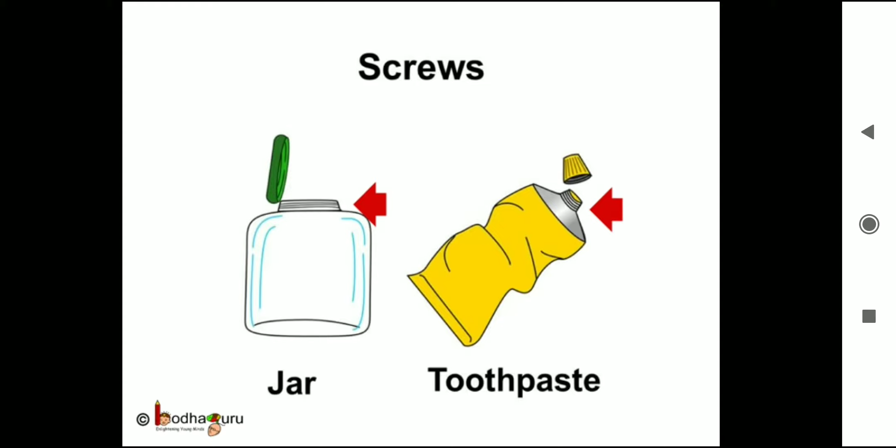We will learn about a very interesting topic, and that is about the most friendly object to us human beings: machines. When you open a jar or toothpaste tube, you rotate the cap or lid, right? You may have seen the small nail-like things used to hold these things. These all are a type of machine called a screw.

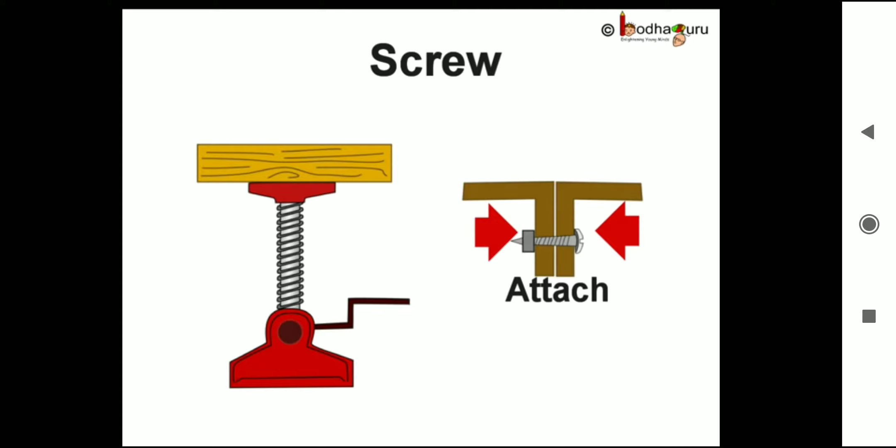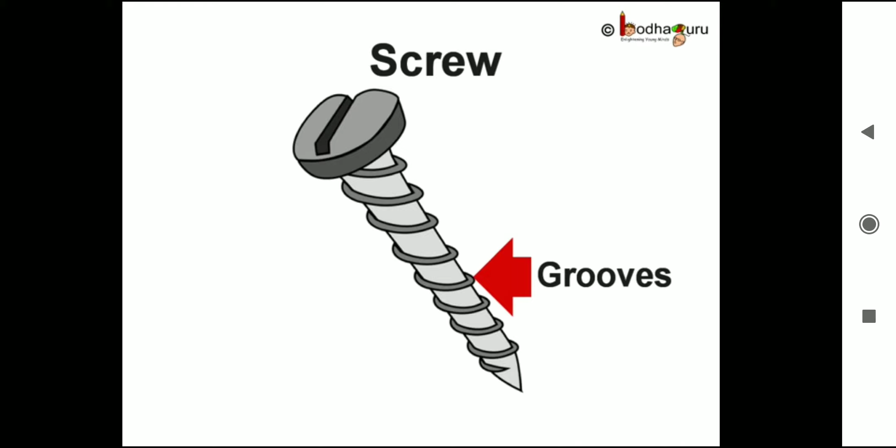Screws are used to lower and raise things. They are also used to hold objects together. A screw looks like a nail with grooves cut into it. It has a winding edge with threads. This winding edge is actually an inclined plane wrapped around a rod. Surprised, right? How does a screw have an inclined plane?

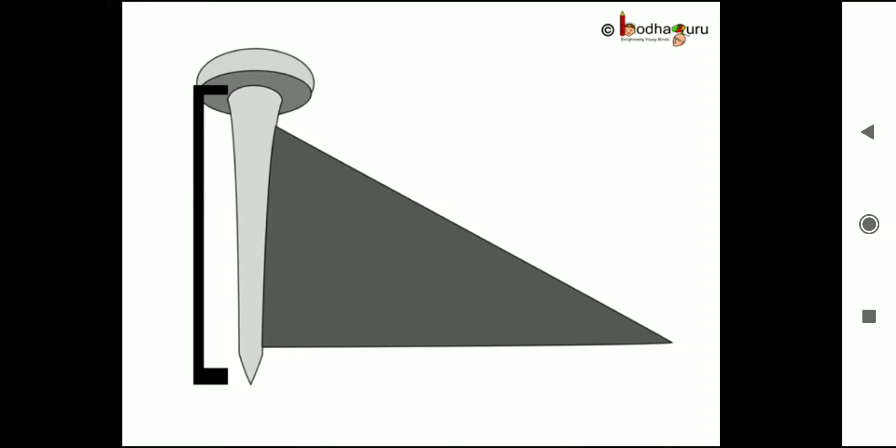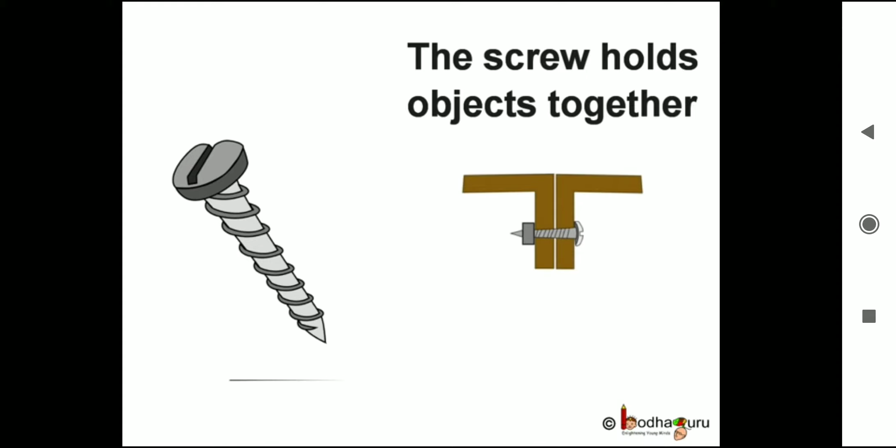Imagine you are folding a paper around a rod, and you fold it at a slanting angle so that the paper goes all around the rod. If you remove the paper, you will see that in a small length of the rod a large length of paper fits in. And these threads are very similar to the paper. In a small length, a larger number of threads fit in, and that is what makes the screw hold the object together. The screw also has a groove on its head where the screwdriver fits in.

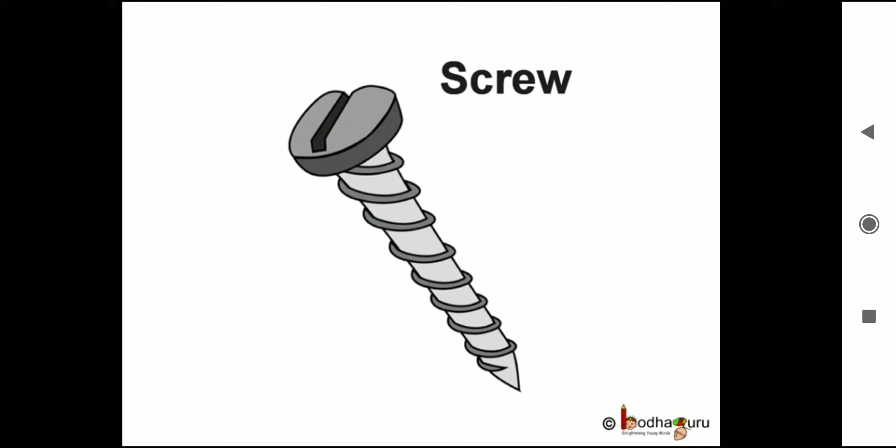The metal or plastic lid on a glass jar is nothing more than a wide screw. The glass jar has a raised edge that forms a screw shape, and the metal lid has a matching thread on the inside. Turn the lid one way and it comes off the jar. Turn it the other way and it tightens the jar.

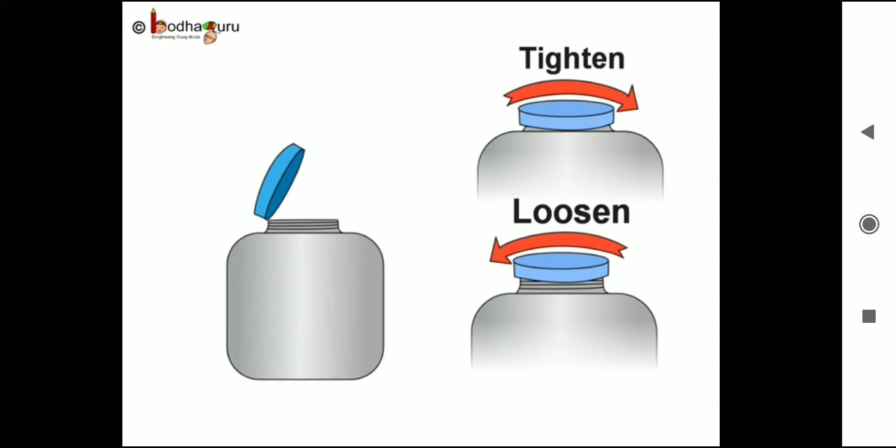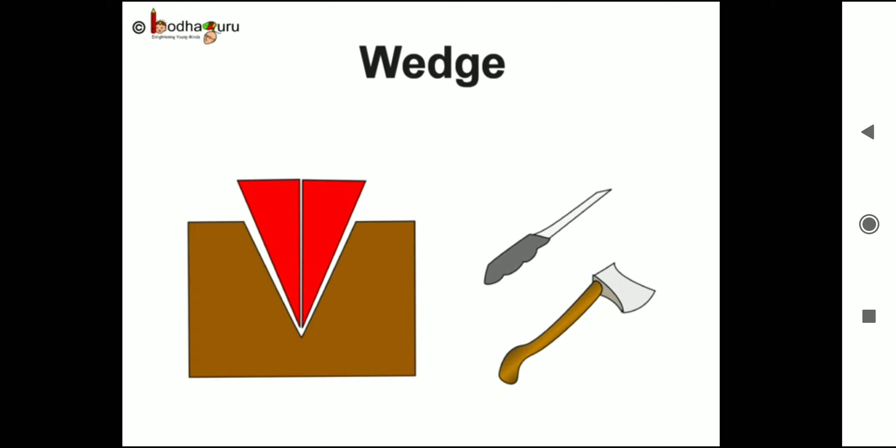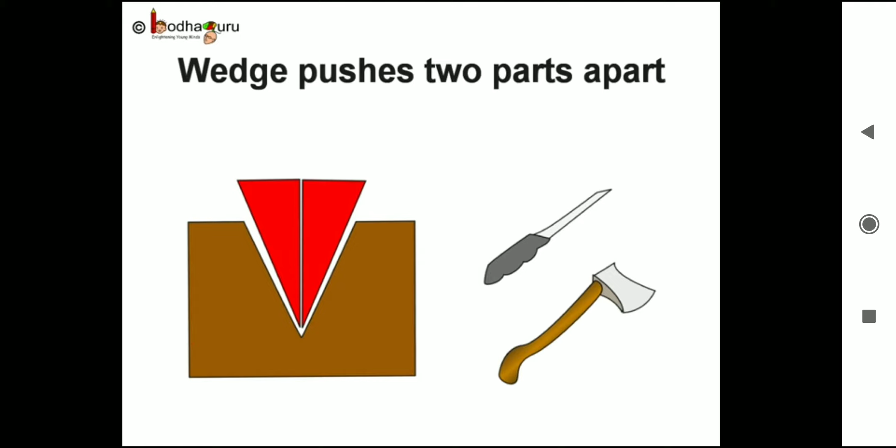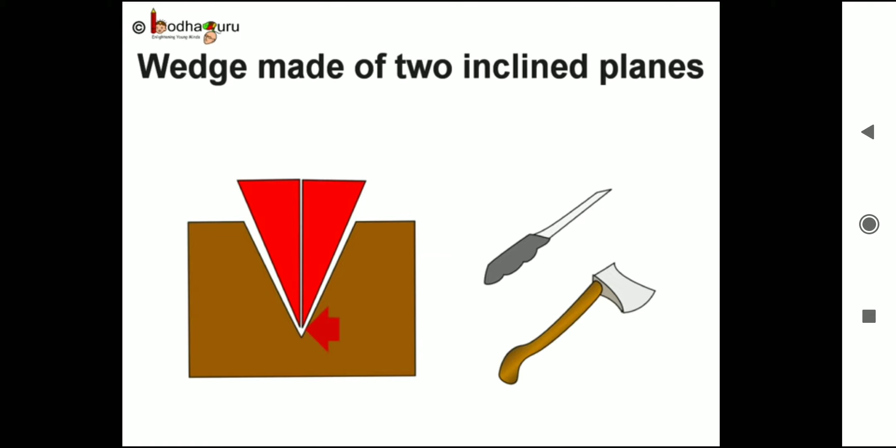You know, our kitchen knife or woodcutter's axe is also a machine. They are called wedges. A wedge is a simple machine used to push two objects apart. The wedge is one of the oldest mechanisms. A wedge is made of two inclined planes. These planes meet and form a sharp edge. This edge can split things apart, so mostly wedges are used for cutting.

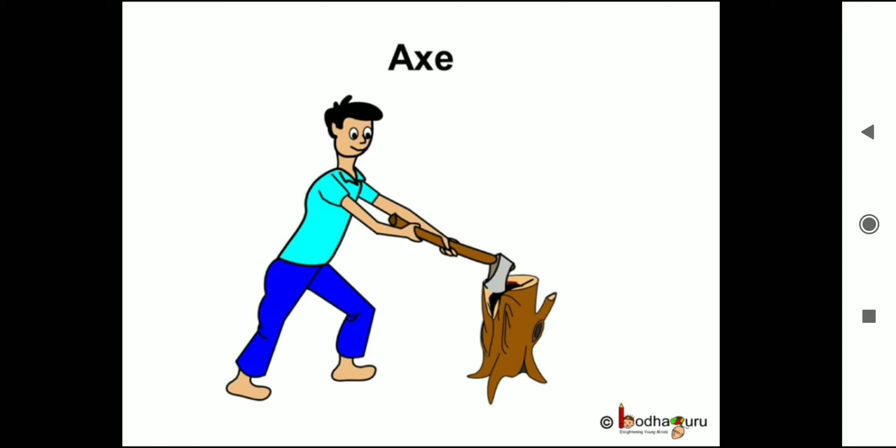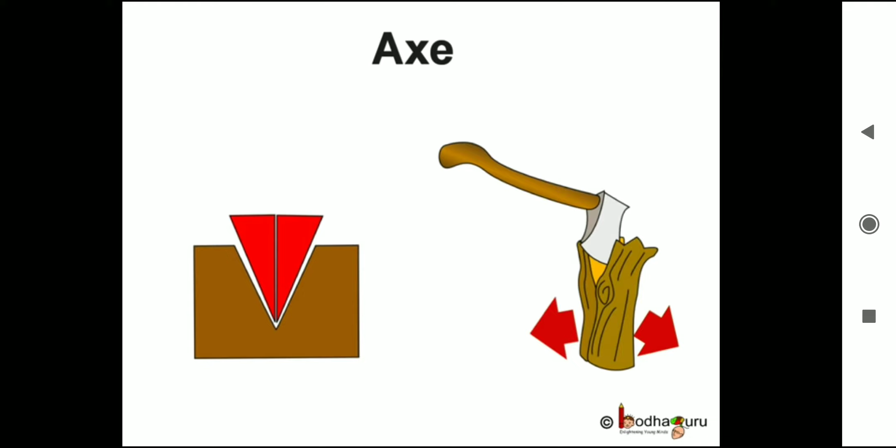A good example of a wedge is an axe, where the head of the axe is made up of two inclined planes which do the work of cutting the wood. We push the axe downward on the top of the wood. The wood is not crushed under the edge of the axe, but rather it is pushed apart into two pieces as the axe moves through it. Nails are also an example of a wedge, used to concentrate the force of the hammer. This way, the nail drives deep into the wooden object or the wall with little effort.

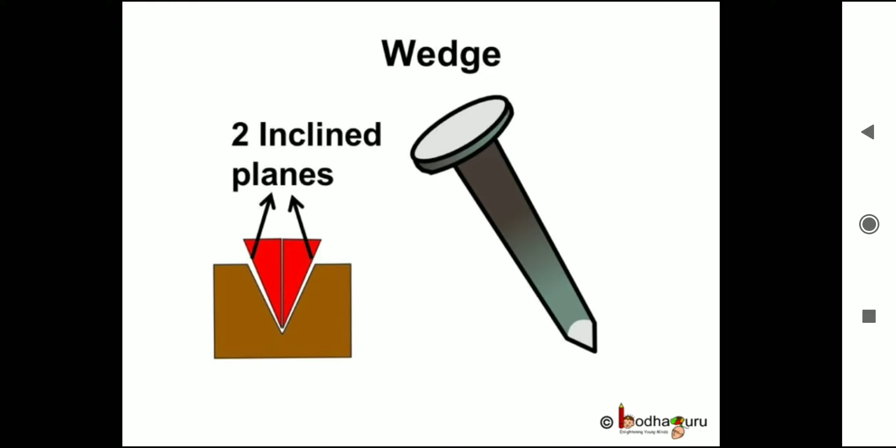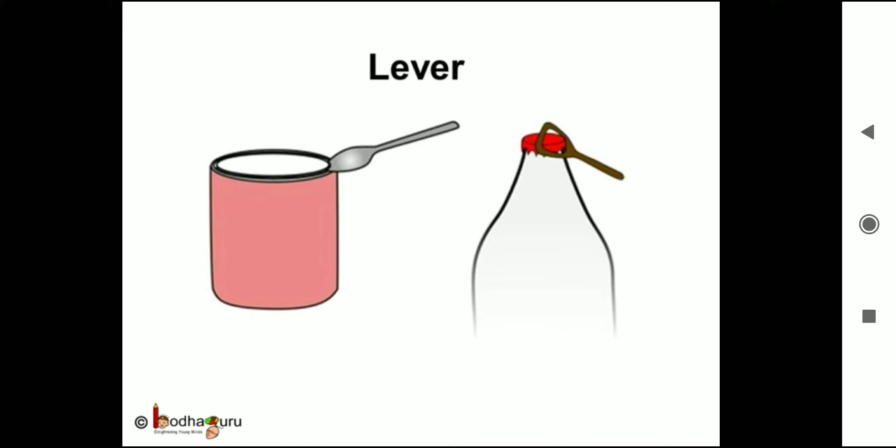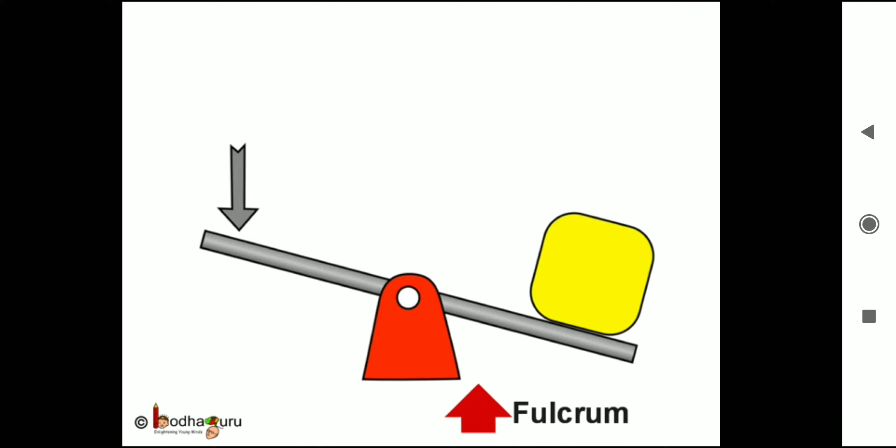When you open a can with a spoon or open a bottle with a bottle opener, you give them a support and apply force to open them, right? This opener is called a lever. So now we will talk about the lever. A lever helps you move something heavy or make something go fast. A lever is basically just a long stick or board that rests on a turning point. This turning point is called the fulcrum of the lever, and the object that the lever moves is called the load.

So a lever needs four things to do work: a bar, a fulcrum, a load, and an effort. The components of a lever can be arranged in three different ways to give three different kinds of levers: first class lever, second class lever, and third class lever. Let's look at each of these. The first class lever is the one you may be most familiar with.

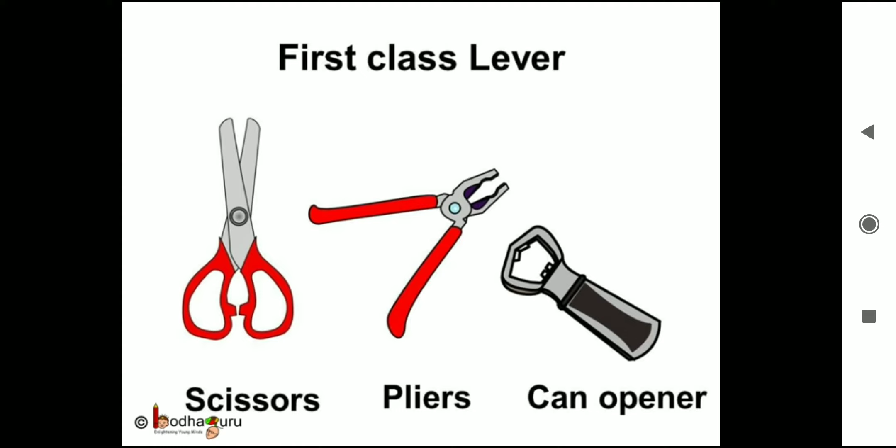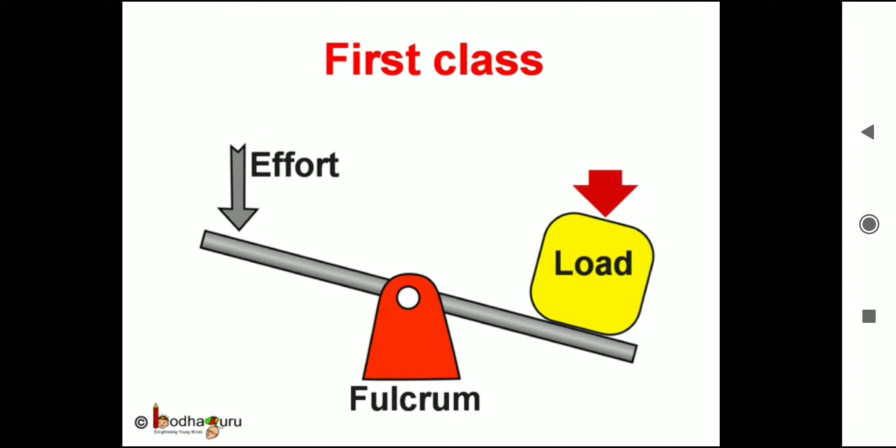Scissors, pliers, can openers, or a seesaw are some examples of a first class lever. In a first class lever, the fulcrum lies between the applied force, that is effort, and the load at the opposite end. A good example of a first class lever is a seesaw.

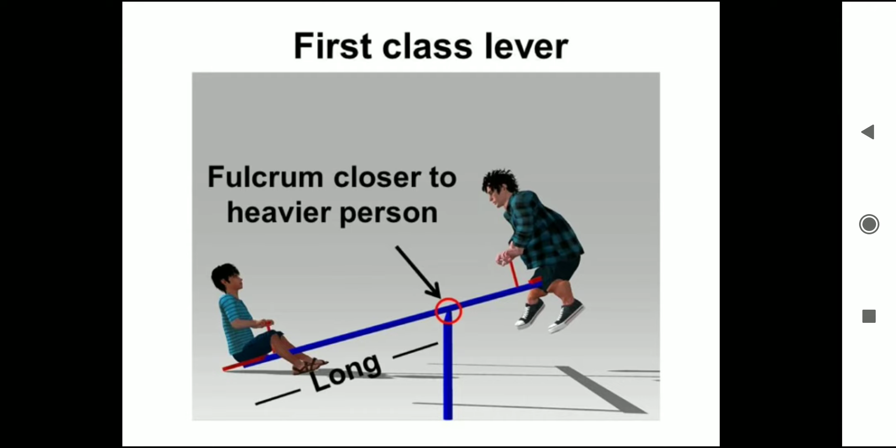Let's say that you are really light and you want to lift a really heavy person on the opposite side. If you put the fulcrum in the middle of the seesaw plate, you won't have a chance. But if you slide the fulcrum closer to the heavy person, it will be easier for you to lift if you sit on the other end. How? Because your side of the seesaw is much longer, so when you move from a much greater distance, you have to put less effort to lift the heavier person on the opposite end, and that is what a lever does.

Scissors are first class levers too, because the fulcrum is between the applied force and the load. The load are the blades. Our hands are applying the force on the opposite end. The more the length of the handle of the scissors, the less force of cutting will be required.

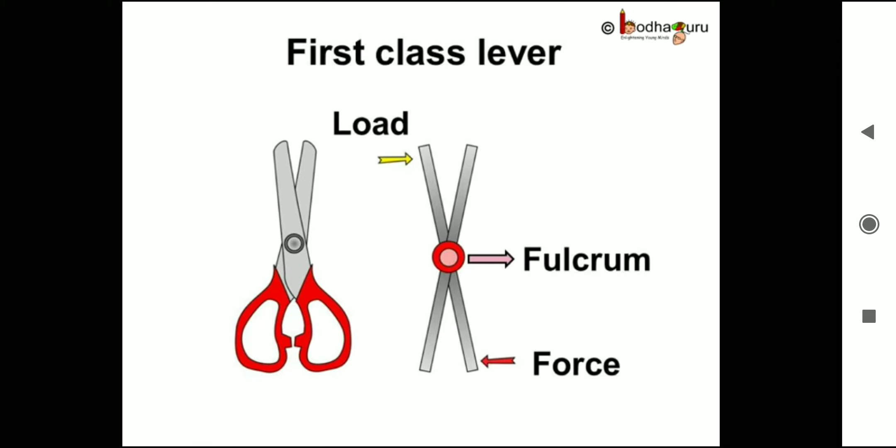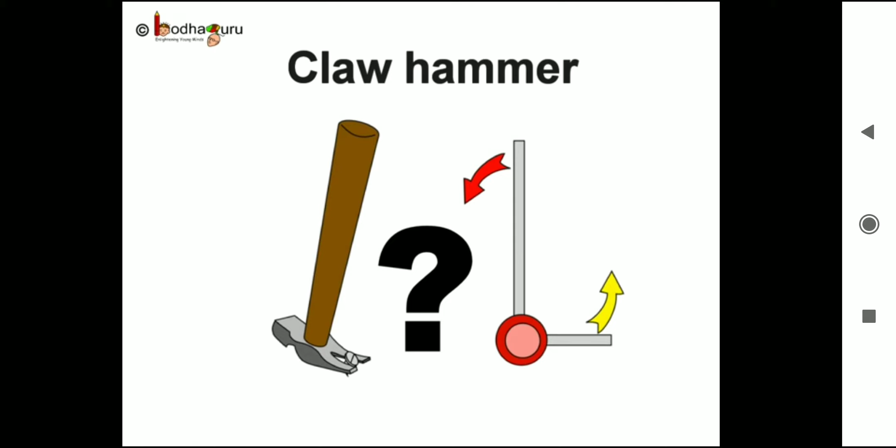A claw hammer is also a first class lever. Confused? No, look at it. The handle and the claw of the hammer work as a lever arm. The fulcrum is the top of the hammer head, which rests against the wood, and the nail you are trying to pull out of the wood is the load.

So the load is on the one end, fulcrum in between, and your effort on the handle is on the opposite end. And as the length of the handle of the hammer on which you apply the force is more than the length of the claw on which the nail is attached, you don't need as much effort to pull the nail from the wood.

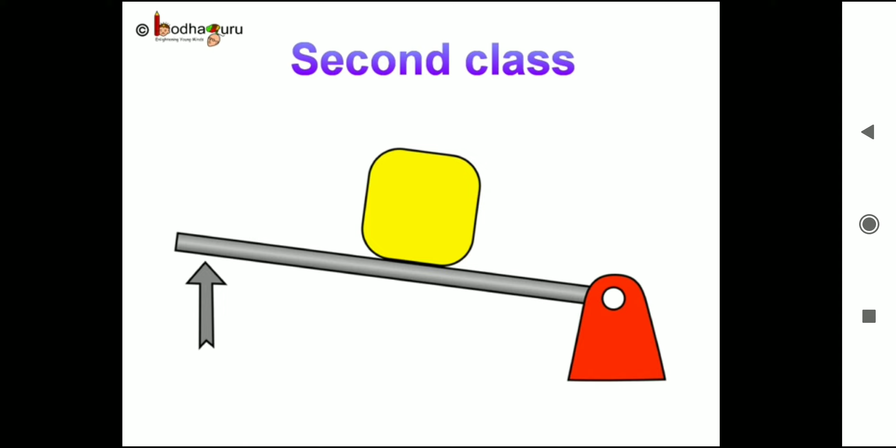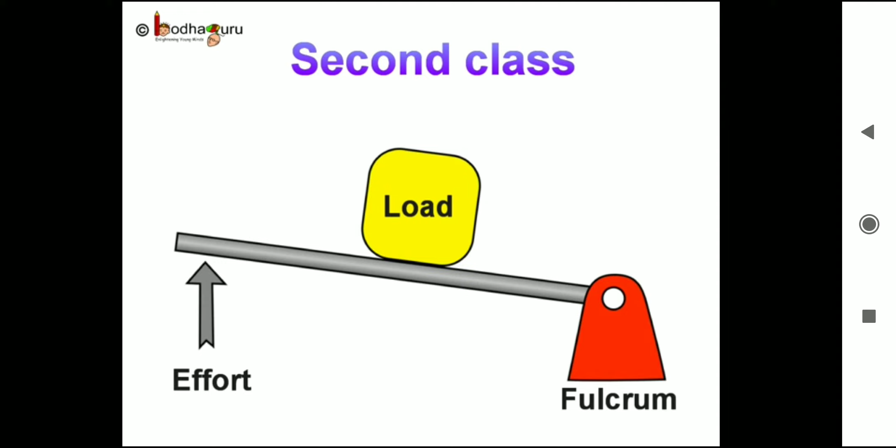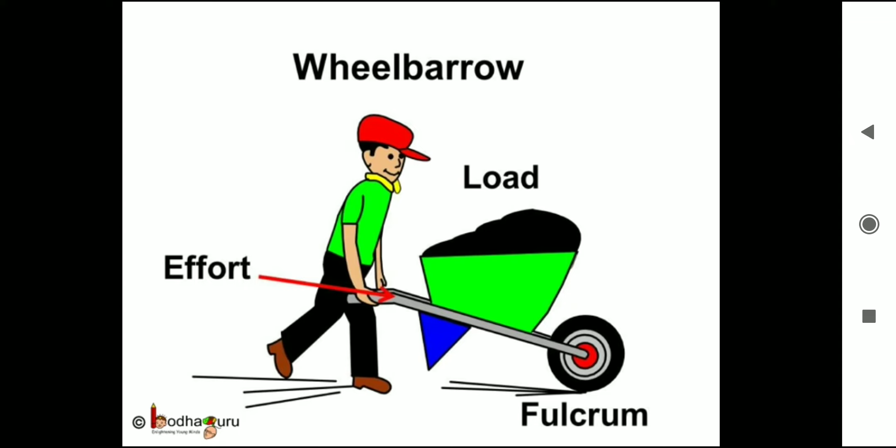The second class lever is one where the fulcrum is at one end and the applied force is on the other. Strange, isn't it? The load that is to be moved is between the fulcrum and the force. The best example of a second class lever is the wheelbarrow. The wheel is the fulcrum. The handle takes the effort and the load is placed between them. The effort travels a greater distance to the fulcrum compared to the load's distance to the fulcrum. So you can lift a heavy object using the wheelbarrow by applying less effort.

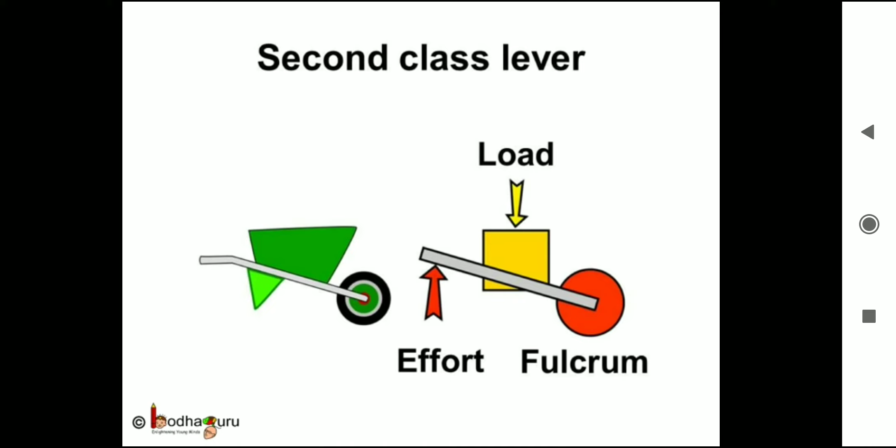A nutcracker is an example of a second class lever where the nut is the load. The upper part works as a fulcrum and the handle takes the effort. So the nut or the load is placed between the effort and the fulcrum. Hence, it's a second class lever.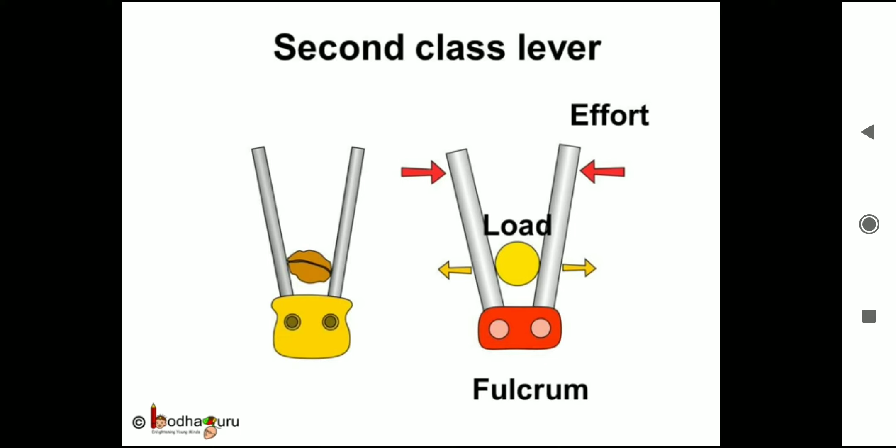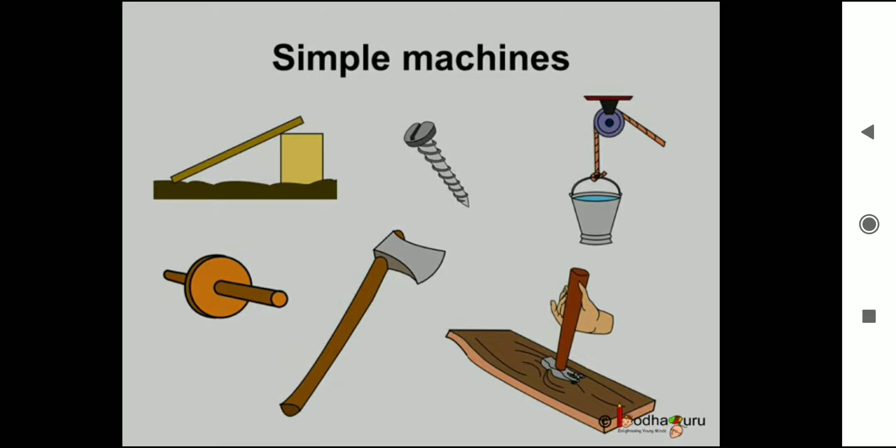So now you know that the simple things around us are actually machines that help us do a lot of work by applying less effort. And all of these simple machines can be joined together to make complex machines like cranes. So machines are very friendly objects that help us in a lot of ways in our day-to-day lives.